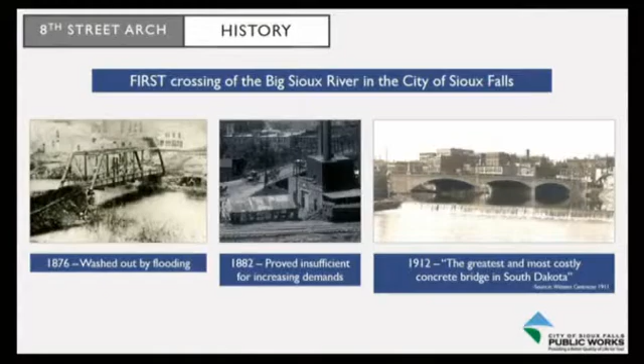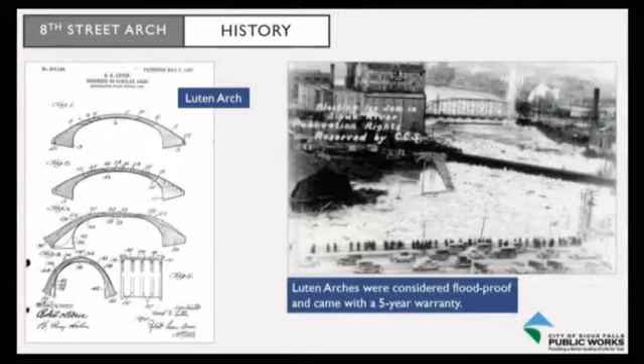So the Luten Arch is a patented bridge, actually developed by a professor at Purdue. Vanessa has done substantial research on Luten Arch bridges to develop the study, and there were over 17,000 Luten Arch patented bridges built across the country. Since there was no plan because it's a patented bridge, we had to do a lot of testing so we could do a full analysis. We laugh that it came with a 5-year flood-proof warranty back in the day, so it certainly stood the test of time.

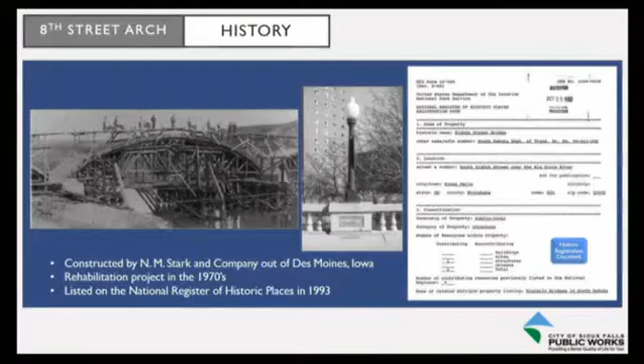Historically, it has been a feature for the city of Sioux Falls, put on the National Registry in 1993, and in the 1970s went through a rehabilitation project. One of the most notable items was the railing on the bridge, which is not original — that was part of that rehabilitation, along with some of the surfacing done back in the 70s.

So for the analysis, when we really start to dig in, we wanted to be confident this bridge could last another 75 years. When you compare it against a new structure, that's really the platform — you want your structure to have at least a service life of 75 years. We do expect that if rehabilitation is the chosen option, which will ultimately be the result today, there'll be additional work at about 30 years, but in a reasonable fashion, not to the extent of this current rehabilitation.

We may move forward and just remove those parking spaces, the two on each side, to eliminate any static loads in that parking space. The drive lanes are fine — there are no load restrictions in those drive lanes.

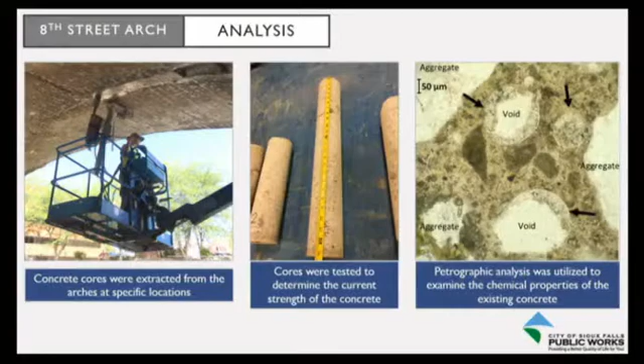If you'll notice that picture on the left, that's more white area. Just a few years ago, we had some instances on the west side of the bridge, right above the bike trail. A police officer who drives the bike trail on his motorcycle came into City Hall and said, 'There's a chunk of concrete that just fell out right above the bike trail. You guys should get down there.'

We went down there. It was some deterioration of the surface concrete, so we moved in and had a local contractor remove all that loose concrete and essentially wrap it with fiberglass. That's what is over both bike trails today, and it's provided a good temporary measure to keep any of that loose concrete intact until we can move forward and do a full rehabilitation.

That's some of the analysis done to understand the level of deterioration, the spacing of the bars, the depth of the bars, so they can load this into design software today and model it with today's loads, to give us a sense of whether this bridge will carry us into the next 75 years.

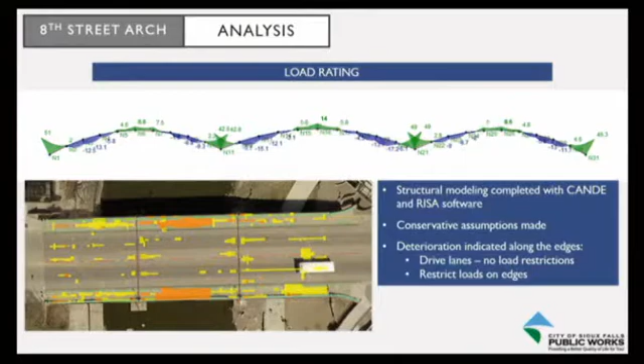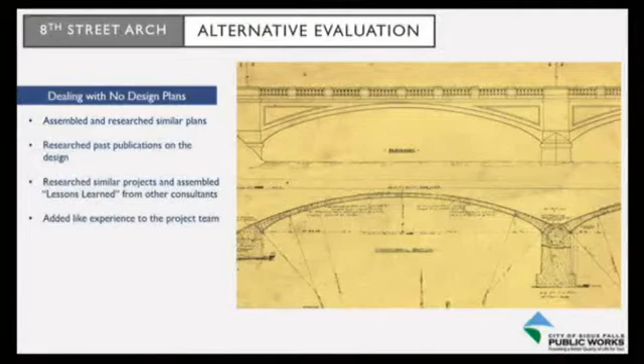So we really wanted that confidence. When Tim Winning came into town, reviewed the analysis and reviewed this bridge, he walked up and said, 'This is a great candidate for rehabilitation.' We've taken a thoughtful approach, not only assembling the right team, but getting the right analysis, running it through today's software to give us confidence that rehabilitation is certainly a viable option for our city to consider.

We'll establish a new drainage system, and ultimately backfill that and do the necessary patching on the undersides of the arches before anything starts to get rehabilitated.

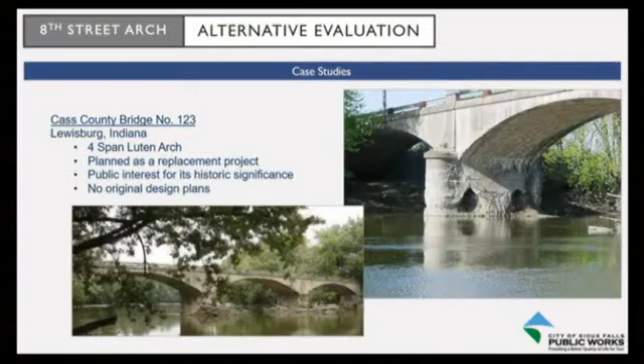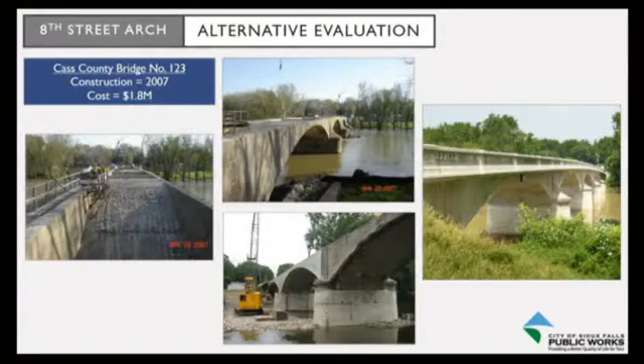Here's a few other pictures—there are two of those bridges. All of these went through rehabilitation strategies. Two of these are Luten arch bridges, the one in the upper left-hand corner and the one in the lower right-hand corner. It's just a fantastic way to preserve history and keep this iconic bridge still in service for our city.

Here's what some of those initial patchwork will look like once you remove the delaminated concrete, reestablish new rebar where needed, and then ultimately patch it back with high-performance concrete. This is what it would look like if you didn't do anything further beyond the repair.

There's a couple of strategies that Vanessa and her team have evaluated. We can spray on shotcrete, which will give us a consistent finish and color, or we could use a similar product that was put above those bike trails, which is the fiber reinforced wraps.

One of the key things we'll want to work closely with is the State Historic Preservation Office, since this is on the National Historic Registry, to make sure they are supportive of what the finish of this bridge will ultimately look like.

So just to give you an overview of the three options in front of you: the concrete repairs and then spraying on a consistent finish shotcrete, just for the common structural elements, would be about $3.2 million. If we did those same strategies but then did the fiber reinforced polymer wrapping, that would increase the cost up to about $4.1 million.

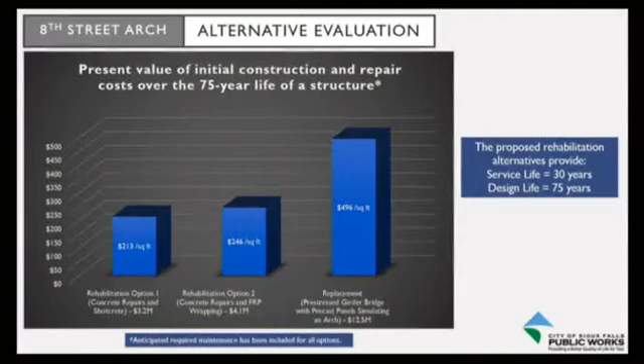We wanted to roll up some of the benefits that rehabilitation provides. We'll still have a good design life of 75 years. Construction timeline to rehabilitate a bridge like this is probably 5 months, as opposed to almost a full calendar year to take this bridge out of service and reconstruct it, which would significantly impact our downtown given the amount of growth and development that's happened, and also the importance of 8th Street to our downtown and daily commuters.

Cost is obviously a factor. This is already showing that the initial cost would be nearly $9 million less, and then it preserves history.

One of the factors you'll see when we bring in Confluence, which is another strong local contractor, or local designer that is the designer of the River Greenway - they can add a lighting package to this bridge that'll wash those arches, very similar to what you see up in Minneapolis. And then on significant days, at holidays and/or St. Patty's Day, you can change the color of those lighting packages.

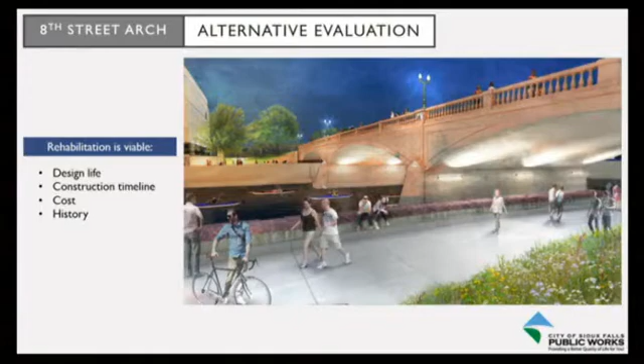That'll certainly be a big part of our public involvement on this project - to really solicit from the community and the downtown area what ultimately we want this bridge to be once we're complete.

Some next steps: we continue to monitor. We have our designers down there every month looking at that outside 10 feet on each side of the bridge and that center arch. Once the typical summer activity picks up and we start to see more parking needs on that bridge, if we see any change in the deterioration, we'll likely be removing those 2 parking spots from the north and south side of the bridge.

Start the design process in 2018. We've already been talking with local contractors about this project, but there are national contractors that specialize in bridge rehabilitation projects that we would also want to get feedback from, but also want to get them interested in this project.

Community outreach will be a significant part, specifically for aesthetics, the river greenway, and lighting, so we want to invest in community outreach and really make sure this is a community project. Ultimately designing construction, starting design in 2018.

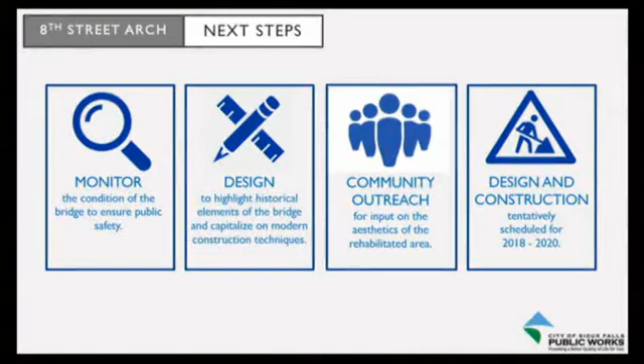The soonest this work would take place is in 2019. We currently have it funded in 2019. The latest we would do it is in 2020. We don't want to rush the design, we don't want to rush the community outreach, and we've got a bridge that we're comfortable with whether we do it in 2019 or 2020.

So a couple of final slides with some proposed renderings. It's been one of those questions we asked once we started to see the cost of replacement closer to $12.5 million. We're really confident in the amount of analysis, the petrographic analysis that took place to understand the strength and quality of the current concrete, and the lessons learned that Mike Wennings, who's on the project team, has been involved with over 24 of these Luten Arch Bridge rehabilitations. We're very supportive of rehabilitation and wanted to present this option to you, ultimately to extend the life of the 8th Street Bridge.

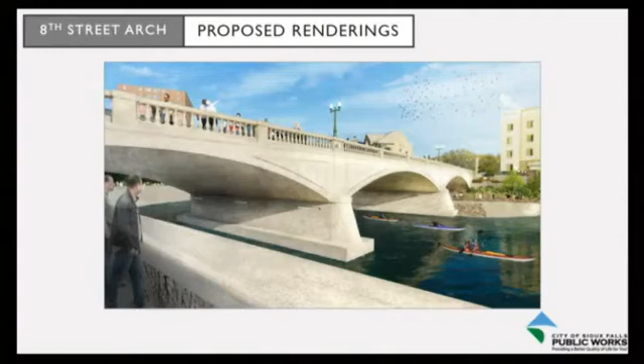One last rendering. Here's a picture of the respective team members involved: Infrastructure Design Group, the lead consultants, were here. Confluence is also on the team, and they did the design of the River Greenway, so they're very familiar with that area and the challenges that came when we built the River Greenway. Also geotechnical firms Braun, GAI, and Kogel.

With that, I wanted to just bring that to you today. The team is here if you have any questions for us. Thank you very much, Director. Any questions? Councilor Neitzer, thank you.

First of all, preservation of history is very important, so rehab would be my gut instinct. There'd have to be an incredibly compelling reason to demolish something on the historic register. Is this something that would be a low bid project, or is it so specialized you'd have to go another route to get a firm to do this, the actual construction work?

Yeah, we haven't gotten to that point, but I would expect that just based on the structural nature of the work, we'll probably lean on those lessons learned, but potentially pre-qualifying bridge contractors may be step one, and then ultimately going into a responsible bid would be step two. Okay, because I could certainly see in something specialized like this that we would potentially pre-qualify bridge contractors, and then after that select the lowest responsible price.

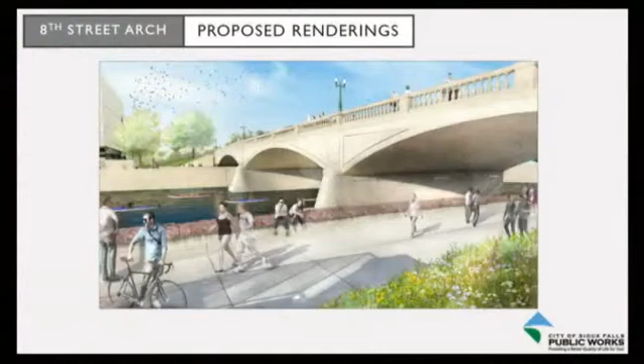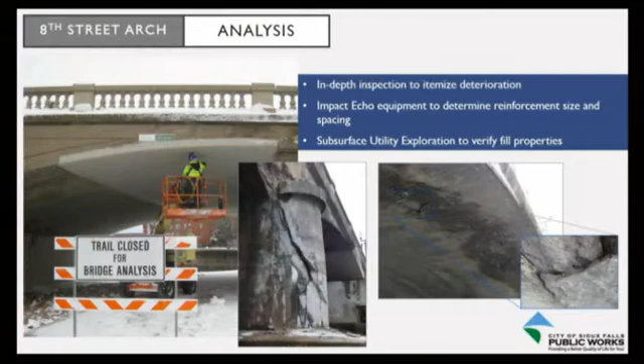There's essentially no scour here. The depth of flow and the velocity of flow are fairly slow, so we didn't see any of that. We feel really confident about the foundation. Essentially your loads are those two piers that are in the river, and then you have abutments on the ends. So the entire weight of the roadway surface is split between the two abutments and those internal piers.

And then my last question - I think I heard you say that in the curved part, is it just earth backfilled in there, with concrete on the top and bottom? That's right, not just one huge concrete mass. Right over the pier, see where those triangles are cast into the outside parapet wall? Behind that concrete is just earth. Part of the reconstruction will include removing the railing, because that's not even up to today's code, and it's got a lot of salt deterioration. But that will be removed.

The asphalt roadway surface is 12 inches thick. All that asphalt will get removed, and then all that earth will get removed, vacuumed out, and cleaned. We're going to reestablish the drainage, so if any water gets through the pavement, we have a positive way to get it out. If any renovation has to be done to the top side, it's almost like putting a roofing membrane on top, and that's probably also where the electricians will route the lighting package.

When we get all that work done, we're going to put larger stone back, about half the size of your hand, so that all the water that gets in there can free drain through that stone mixture down to a relief and out. That drainage would be important, because you could imagine the earth freeze-thawing and heaving the concrete. That's been one of the key factors right now — what's deteriorating this bridge quickly is the drainage is in really poor shape.

May I ask a follow-up question? Is there any difference between the weight of the soil currently used as fill and the rock you will be using? Not significant.

One of the ideas that Vanessa brought to us is that we'll be able to switch the deck from 12 inches of asphalt to probably an 8-inch concrete deck. It will actually reduce the weight and give a much longer serviceable life. We've learned a lot through the process — Vanessa and her team have done a lot of research with other agencies that have rehabilitated these Luten arch bridges, and we're excited for the future of this bridge. And if you increase the drainage, you decrease the load at the same time too. That's right.

Other questions? Councilor Rolfing: I'm not a structural engineer, but I do know when you throw a bunch of rocks in there and put a surface on it and drive stuff over it, they settle. Somewhere in there it's going to settle — how do you stop that? I'm just following up, how do you stop that?

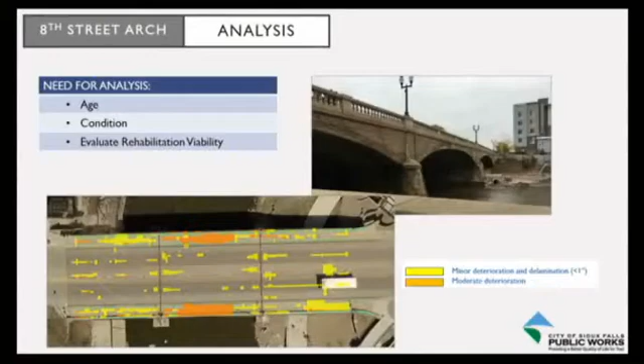Okay, then question 2 and 3 are kind of together. How old is the 6th Street Bridge, and could we be looking at any funding from the National Historical Society, or some kind of grant to help with this? First, on the age of the 6th Street Bridge — Wes, do you have that? I believe it was in the 70s, early 70s when the 6th Street Bridge was constructed, and that's a very traditional metal bridge, not like the Luten Arch Bridge.

Because, did you say that's the second oldest bridge in our city then? No, that's the next one we've targeted based on its sufficiency rating, and then our next one after that would also be the 49th Street Bridge. So do you know what the second oldest bridge is, just curious? We'd have to follow up — every one of our bridge inspections shows the age and the sufficiency rating, and I just don't have that off the top of my head.

And then how about that historical grant — is there a chance it could help pay for any restorations? We can check. There may be some abilities when we're working with the State Historic Preservation Office to see if there's anything tangible for us to source. We'll certainly check.

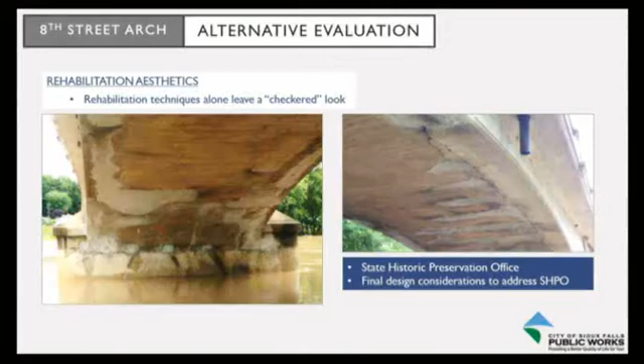I think one of the key things we really want the public to help us on is we don't have an arch bridge that the lights wash today. With all the pedestrian traffic down there, there'll be a greater lighting package above and below. There are also elements of the River Greenway that weren't done because of the anticipation of this bridge, so we'll be looking at those options and trying to get the community to help us figure out what that complete project ultimately looks like.

Are you going to have open houses? We haven't fully designed that aspect yet, but we'll do some presentations to the downtown groups, start to facilitate who would like to be involved, and likely a collection of architects. Ultimately we'll probably create more of a public outreach steering committee that helps us vet through options and get feedback from the public.

So can we hold you to these numbers we have on this sheet here? Looking at the three sheets you've got, it'd be nice if there was a number on the slide for the concrete repair. So on all of those, you're going to be taking that backfill out, is that correct?

That's correct, all of these have that upper renovation of putting more fill in. So at the end of the day, you're not bringing these three options to the council to vote on, you're probably bringing us one thing and we're voting on that, is that correct? That's what we would say. We know our job is to deliver you an efficient infrastructure package.

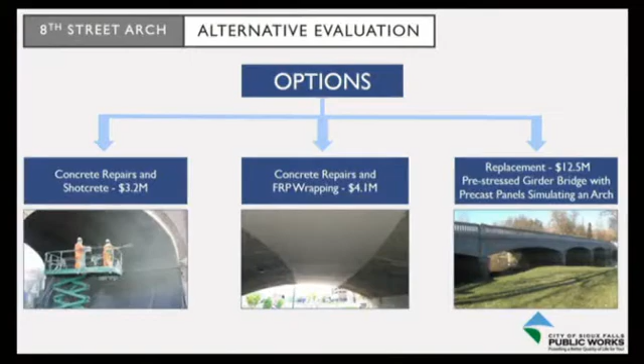Councilor Rolfing just mentioned to me, and I'm still learning how these things play out, but he said this will all just be in the budget. So we probably won't have any input into it then, as far as approving the final cost, correct? When we approve the budget, that will all be part of the package.

That's right, it's actually in your current CIP today, 2018 through 2022, and the 8th Street Bridge design that would start this year is in there. But we wanted to answer the mail on whether rehabilitation is even an option. Either way, we're going to deliver you a good rehabilitation project, and it would either involve shotcrete or FRP wrap.

One more thing, can you tell me on the consultants so far, how much have we paid in consultant fees on this? We went through more of a gate system on this rehabilitation. The first contract we did, we did this analysis for about $118,000.

We started talking about this project and really pathing forward about a year and a half ago, to have some good time and contemplated thought going through this study. Our gate system was, let's actually get in the river and look to see if we've got any scour issues, because that was somewhat fundamental if we wanted to try to save this bridge. We knew if that didn't come back right, we were probably going to cease the project or significantly change the scope. That turned out very well.